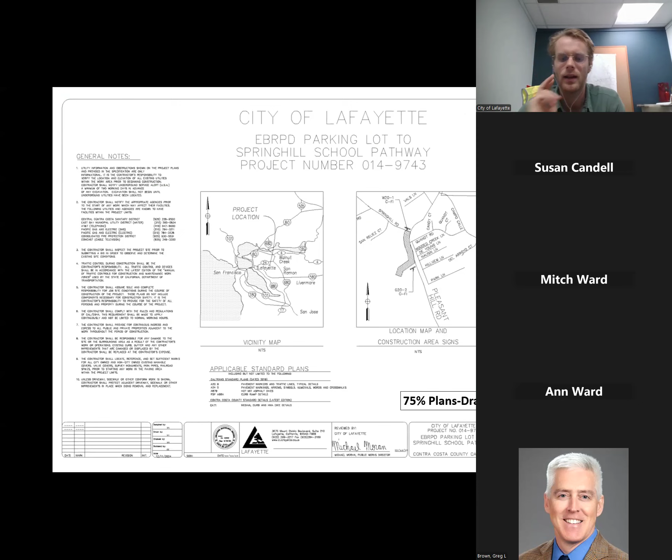So here is the pathway plans. Let me see if I can zoom in. You see my cursor? Yes, we can. Oh, you can? Okay.

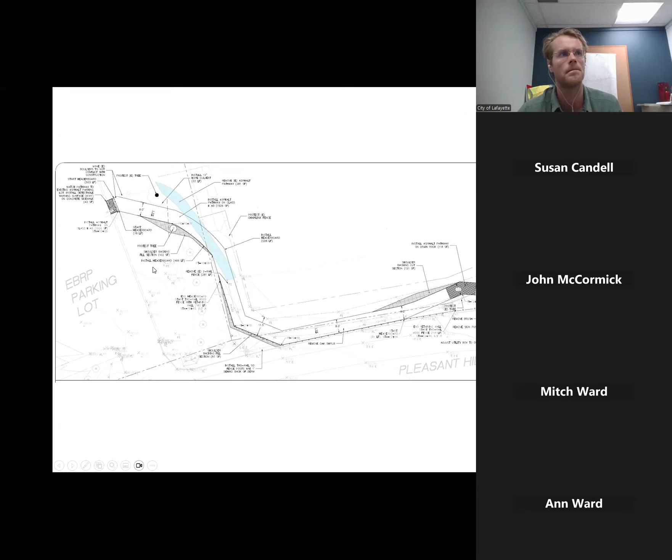So this is going to start at the East Bay Parks parking lot. It's going to start with a little concrete pad. We're going to put a detectable warning surface on that - those black dome kind of things you see at every curb ramp. That just lets visually impaired people know that they're going onto a new surface. So it's going to start off with that concrete pad and then quickly change to asphalt.

That path is going to be 8 feet wide. On either side of the pathway, it's going to be bordered by a wooden header board. Going further down the line, it's going to transition to this retaining fence. This happens where the existing fence is. We're going to rip out all that old existing fence and scoot the pathway closer to the road for potentially further expansion in the future.

So we're going to start that retaining fence about maybe 150 feet in, and then continue it along a little into that gravel makeshift parking lot that's going on there.

This will be 8 feet wide, but there's a tree at a pinch point near the existing chain link fence, so it's going to neck down to about 7 feet wide right there and then expand back out. On this segment we're going to remove some oak shrubs but try to protect the existing trees right there.

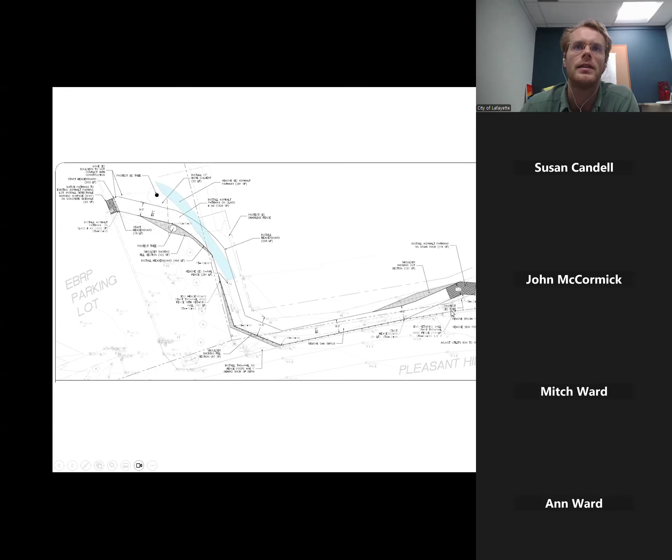This is a continuation, mostly in this parking lot area right now. We're going to take out all the parking stalls because we're putting in a fence and guardrail. There will be an opening from these barriers, right now it's at 15 feet, but I'm going to make it wider because that's pretty tight for people to turn in.

This is for these AT&T cabinets, there are two big cabinets right here. These cabinets serve a lot of comms, so we want to make sure the maintenance workers have good access to them. So there's going to be a gap.

We are going to post a utility parking only sign right there to prohibit any Springhill school parkers from parking in this area. Also along this segment, to help facilitate drainage, we're going to put in a concrete curb and gutter, so any water that comes off the road will get collected and shuffled down the road and not muddy up our sidewalk.

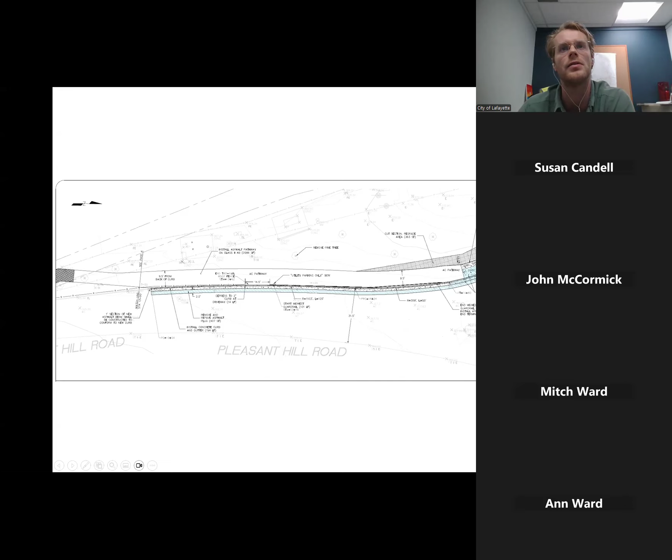And right here is where that new speed hump was put in, that crosswalk. So we're going to be connecting to that existing concrete sidewalk right here.

So these are typical sections, kind of what you might see for the cross section. This is with that wooden retaining wall right here, so we have a fence, two-rail fence, and about a 1 foot of retaining. This retaining wall is necessary to flatten out the grade to meet our ADA compliance. The ADA compliant cross slope is a maximum of 2%, but we're going to design a little under that so it doesn't go over.

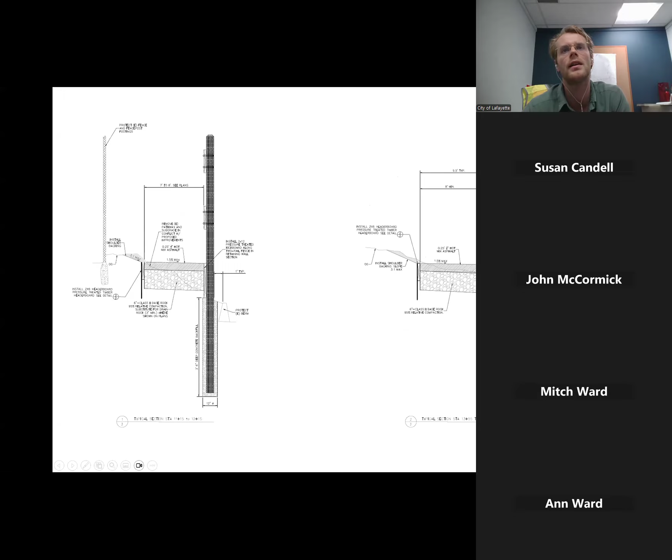Over here, this is a segment where the guardrail is. This is the new curb and gutter shown before, and here's the new guardrail that's planned to go in. On the naked side of the pathway we're going to put a header board to further retain it, and it also kind of cleans up the lines a bit too.

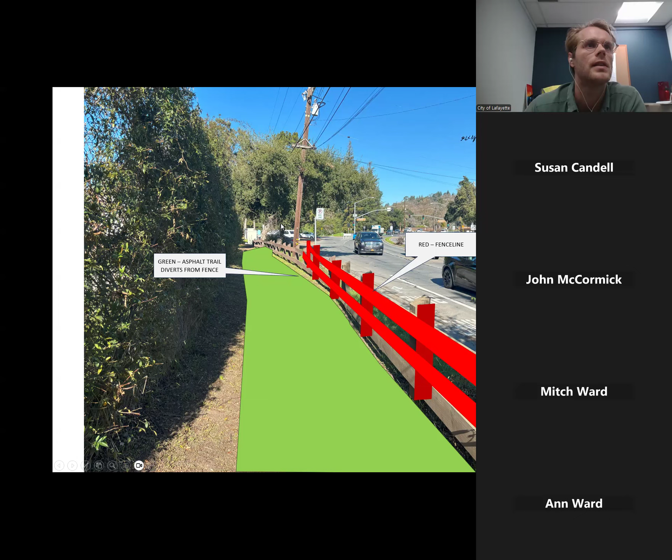So the fence is going to be held along the back of the existing berm. The pathway is going to go to the left of this existing tree and then cut over in between these two trees, moving more towards the edge of road right here. When we do this, we're going to have to take out this shrub, but we are planning to save the trees.

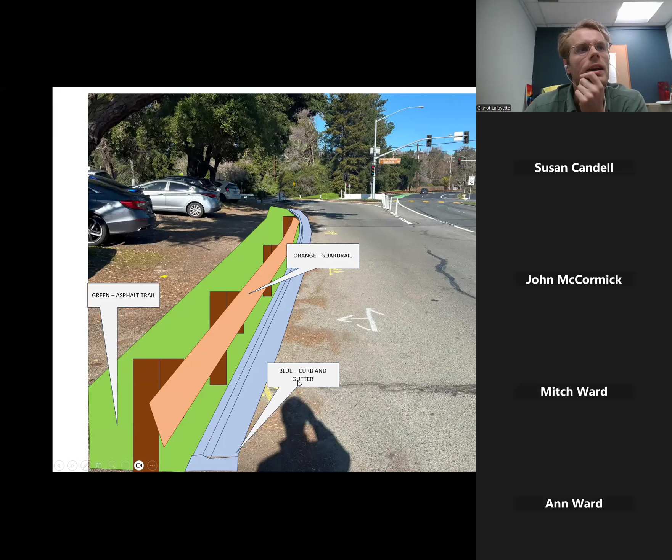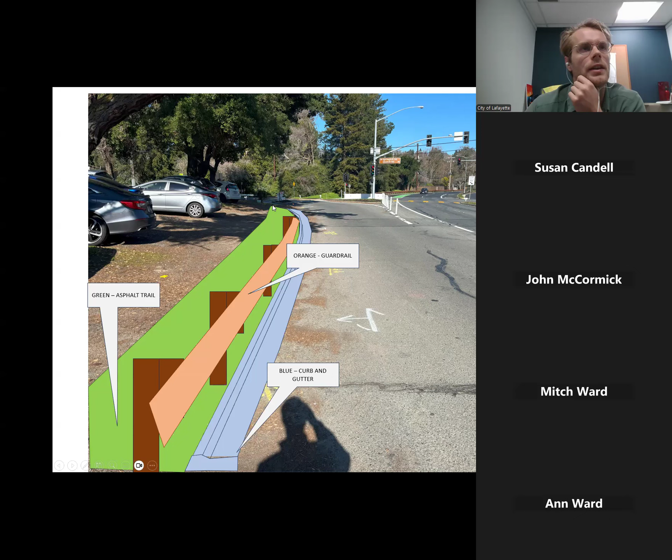And this segment right here, this is where the guardrail is going to start, just after that gap opening for the utility trucks. It's going to look like this down here. So curb, guardrail, asphalt pathway, and then it's just going to connect into the existing concrete sidewalk.

So this is what it'll look like. You see how there's a pathway. Instead of this asphalt berm, there's going to be a concrete curb and nice dividing. This rusty color is Cor-Ten. It's deliberately sought out for that nice rustic feel. You see it all over Lafayette.